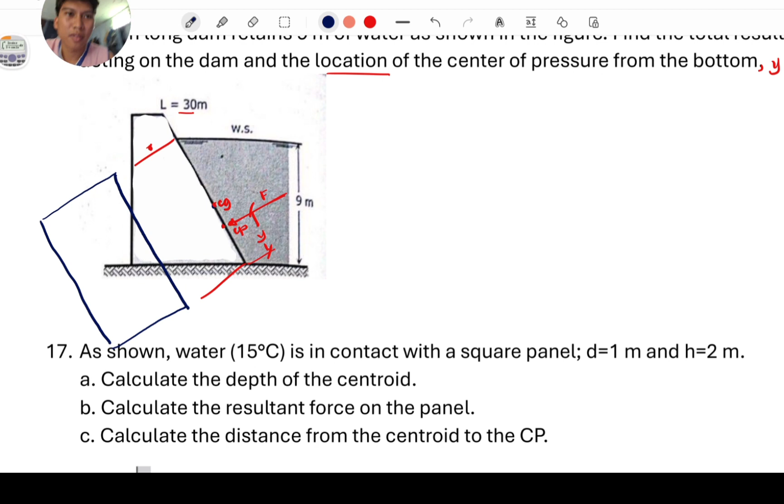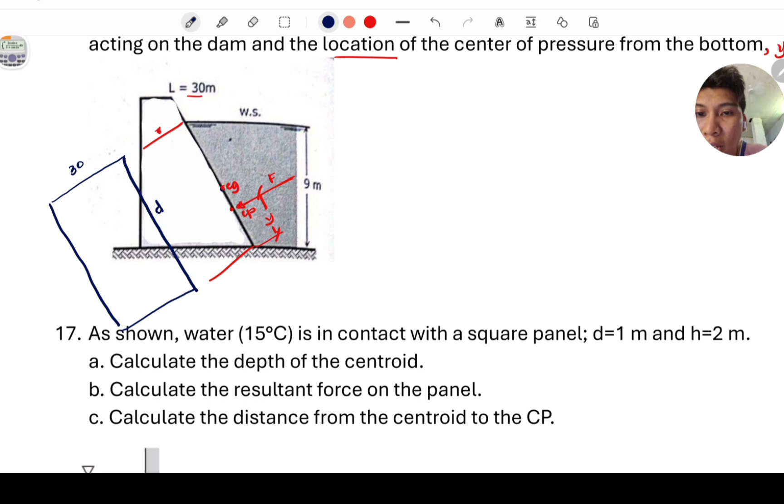Then we have here the forces. This is the height, D. Then this is the width of 30 meters, or the length. Of course we need to get the angle here. In the figure I have it given but covered - let's remove this. It's the same, we have 60 degrees as the angle.

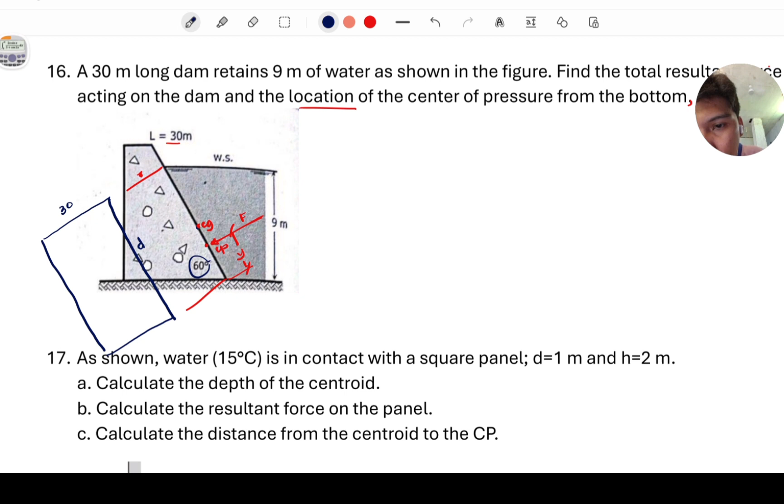Let's isolate this. Let's draw first. From the centroid to the water surface, we can call this y-bar. And then this distance from here, we can call this h-bar. Then the distance from the centroid to the center of pressure, we can call this the eccentricity.

My drawing is messy. So we need to solve first the value of F. To do that, we have the formula for the force acting on the plane given by gamma times h-bar times A.

So we can compute the value of F. But in our case, for the area, we only know the length or width of 30 meters. We don't know the depth or the height. So what do we need to do? We need to solve for the height of the inclined gate itself.

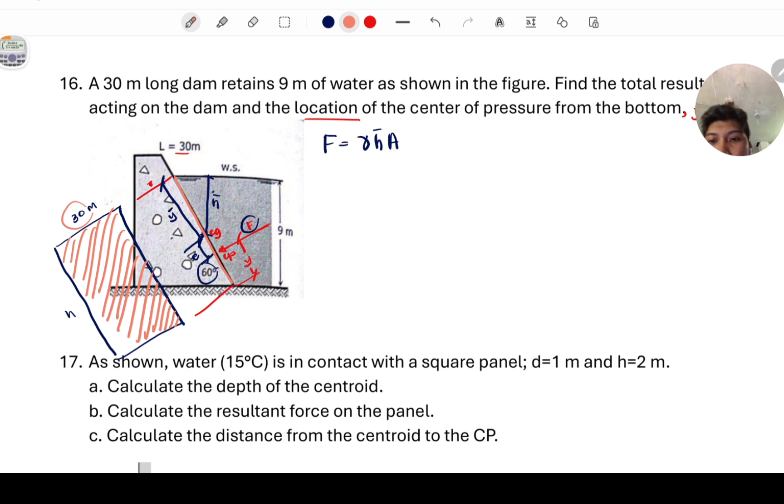Let's isolate this. This is the gate. This is the bottom. We have 60 degrees here. Then if I move this, this is our water surface. This 60 degrees is equal to this one, by geometry. Same angle there.

Then we have the height of water given as 9 meters. So we have a triangle. We're looking for the value of h. To do that, we can use the sine function: theta equals opposite over hypotenuse. We have an angle of 60, and the opposite side is 9.

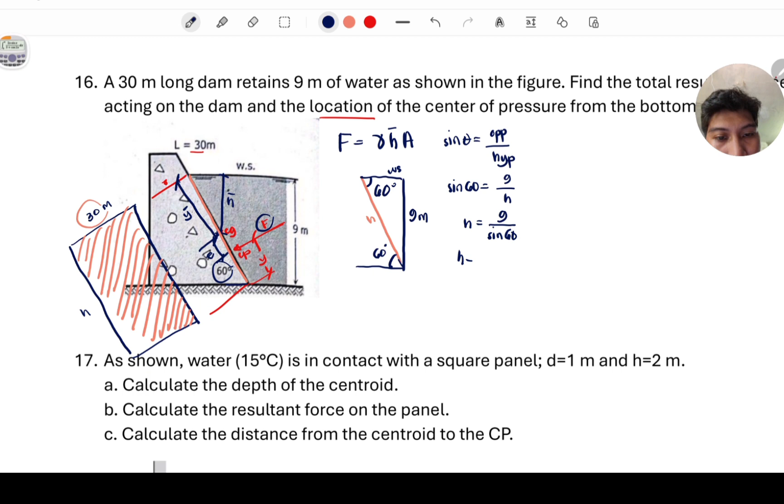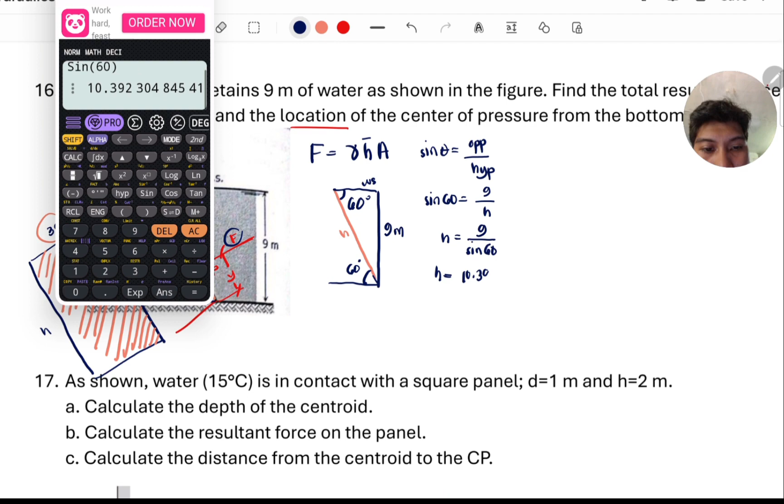So computing for the value of h: 9 sine 60. So h equals, using the calculator, 9 over sine 60, we get 10.39 meters. That's the value we'll use for the area.

Compute for the force. Gamma - it says water. So gamma of water, let's use 9.81 times the height or h-bar. Our h-bar is just half of the water depth, so 9 over 2 - what's that? Using the calculator, we get 4.5.

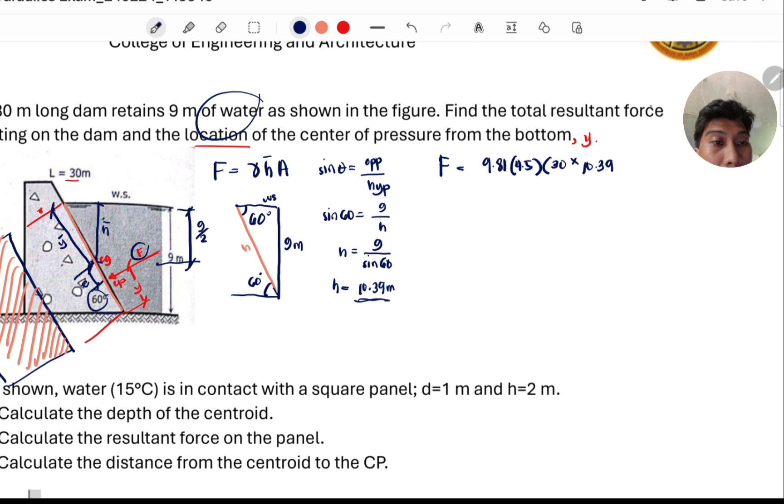And then we have the value of the area, 30 times the h, 10.39. So we can compute the value of F, which equals 13,763... 13,763.049 kilonewtons, F. This is the final answer for the resultant force.

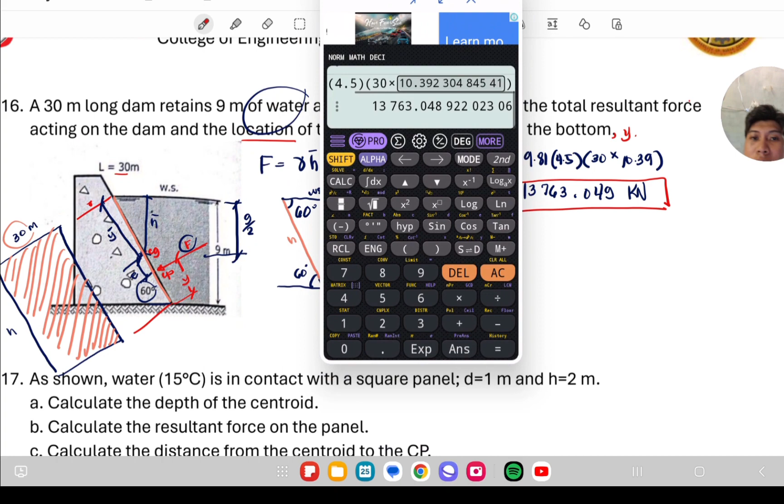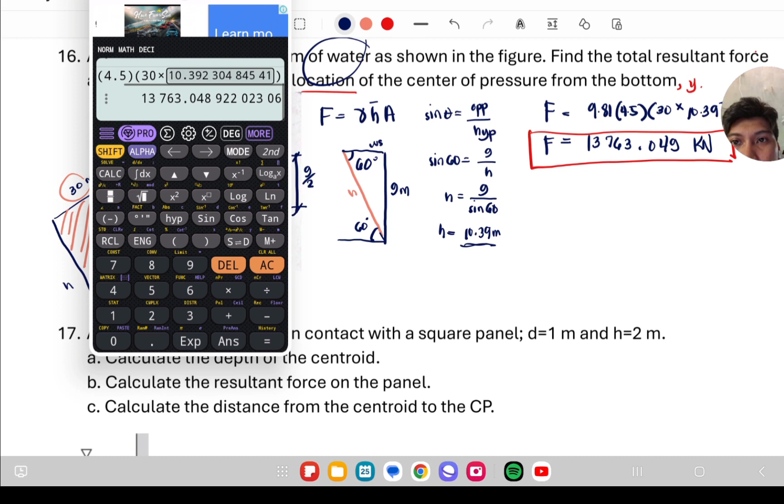For the value of y, we can use the pressure diagram. So it happens like this - this blue color, let me minimize this - this is the gate, and the pressure diagram looks like this too. Let's change the color so you can see.

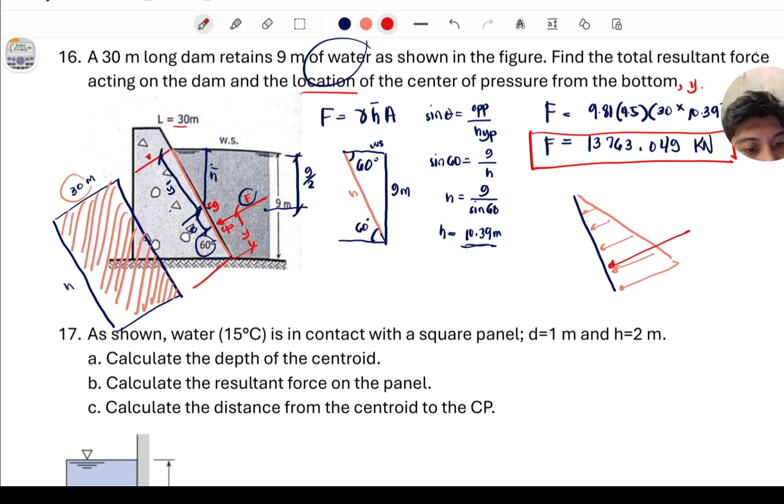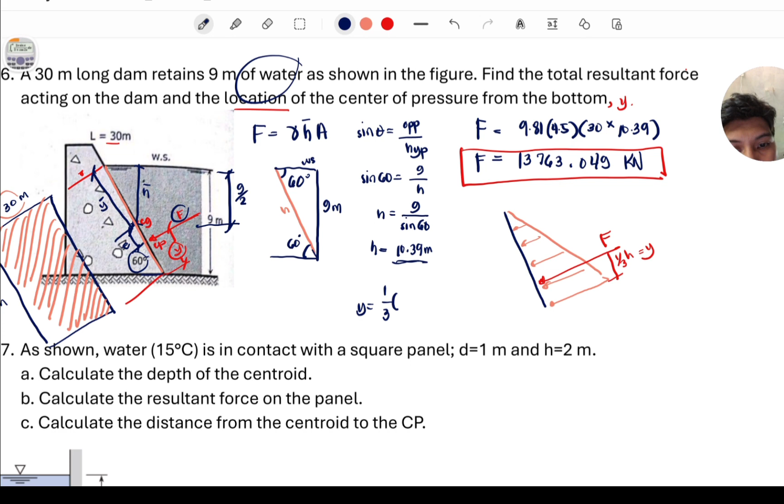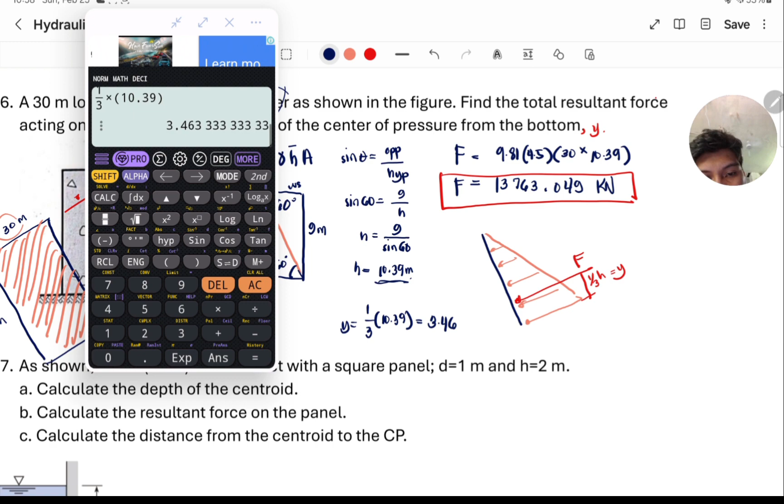Then our force always acts at the centroid of this pressure diagram, F. So we can say the value of this is 1/3 of the height, which equals y. So y equals 1/3 of 10.39, which is 3.463 meters. That's the answer.

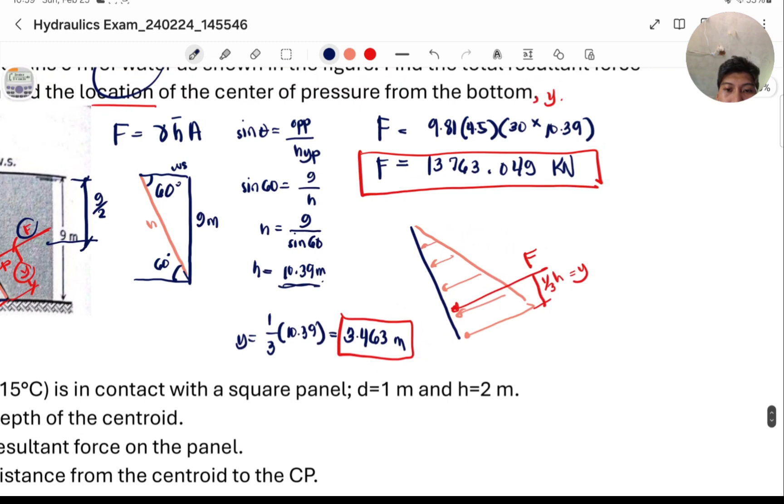Then y is here. Then its centroid is here. So this, 9/2, right? That's our h-bar. I mean, no, that's our h/2. Which we computed as 10.39.

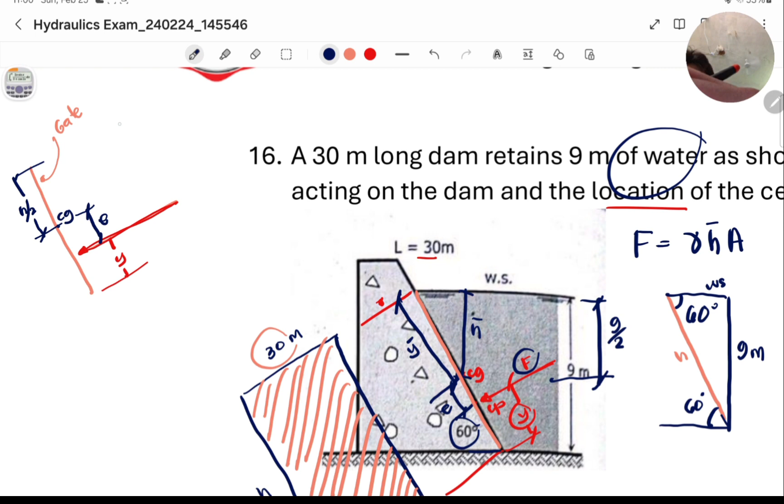Then this is the e. So from this figure, we can say this is the total h. We can say that the value h/2 is also there. We can say that h/2 equals e plus y. So you need to compute e, which is equivalent to the value of I over A y-bar. Once you compute e, use this equation. So yeah, very easy.